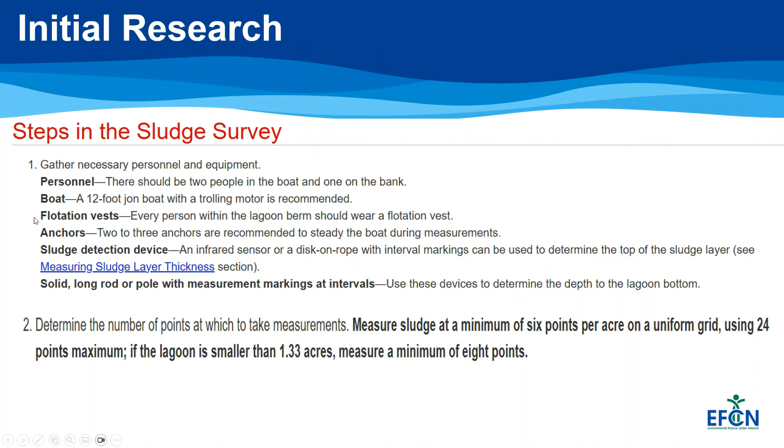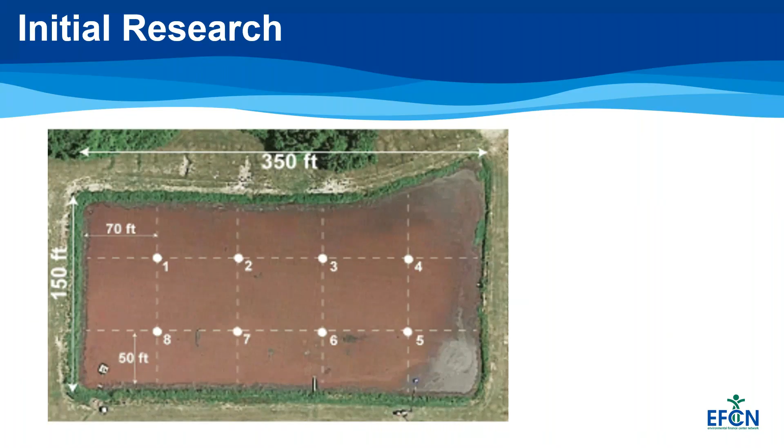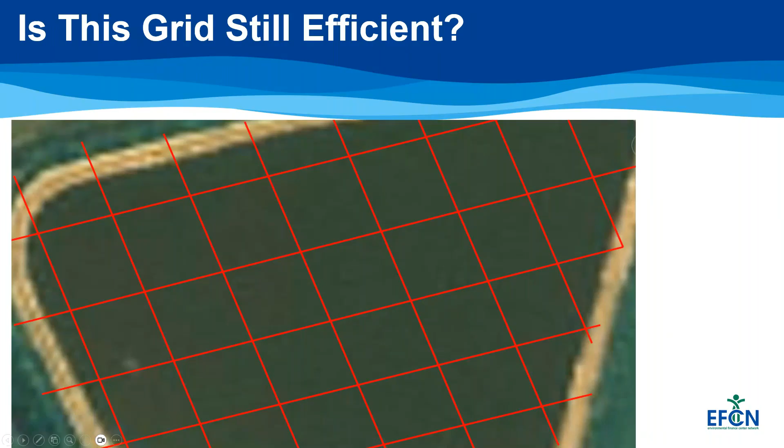Going in a little boat and trying to make sure you stayed in the grid with windy conditions, making sure you don't fall over, grabbing a sample with your sludge judge, mapping it, and moving to the next spot didn't seem like the best use of our time and resources. This could very easily turn into a whole day project or longer depending on the number and size of the lagoons. A grid this size might give an okay representation of the lagoon, but this would be very time consuming, and most places have multiple lagoons, so it could be a multi-day project for 3 of our staff members.

I don't really want to speak for anyone else, but this is not how I would want to spend my very warm summer months in Iowa or anywhere else. It's not comfortable. It's going to be very warm. You won't feel the breeze. Drawing on your map would be hard. And what about when you need to go to the bathroom? Is this what you would really want to be doing with your day?

That's how we have always done it. That phrase should never be said. It's probably my biggest pet peeve in the industry. Just because it's always been done a certain way doesn't make it safe, efficient, or correct. Understand why you are doing something a certain way.

It is okay to still measure your sludge with a small pontoon or flat bottom boat, but make sure you are doing it safely, and make sure it isn't costing you more to devote a required amount of time for your staff to do this rather than have someone come in and handle it for you. Some regulatory agencies require sludge measuring to be done annually. How many hours are devoted to this annually, from planning to execution? How many other projects take a backseat when you have multiple staff members at the lagoons for days?

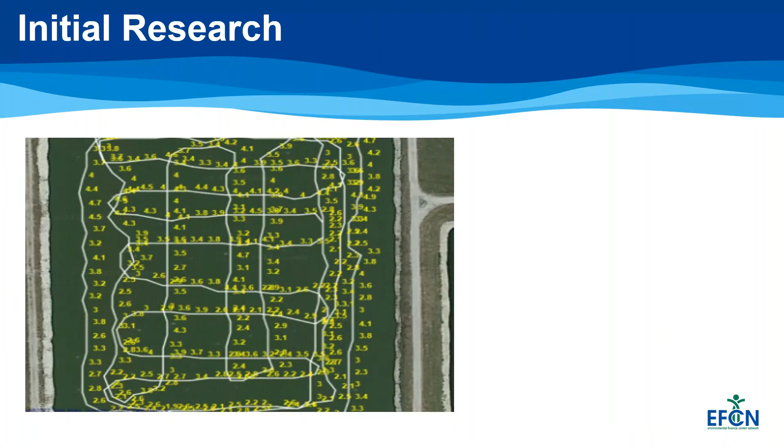One of the first remote control boats we found was really nice and had a lot of bells and whistles. This would have been a great option if we were doing this for a profit. Aside from the cost, we would then be responsible for any damage and repairs, and needed to have licenses for GPS, the data program, and stay on top of needed updates. So we kept looking for further options.

I ended up being able to drive down to southern Iowa and meet up with a company from Centralia, Illinois, and see what their boat was capable of doing. I was able to not only see how they set up for a survey, taking all the necessary data points, like measuring from the control point to the top of the water, but I was able to walk with the employee and see how quickly and easily he could maneuver the boat. I even got to drive it a little bit.

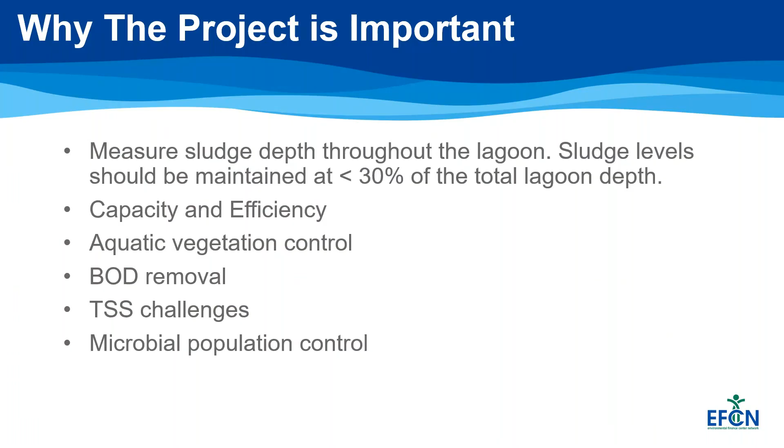Starting with a newly started lagoon, or one that has had the solids removed recently, you'll have a very thin layer of sludge. That will allow enough volume of water to give you the needed detention time for proper treatment. There will be enough water to keep sludge odors to a minimum, and sludge will not build up in front of the influent pipe or be carried out over the effluent weir.

Sludge is composed primarily of organic matter, meaning it contains carbon and is of plant, animal, or human origin. It also consists of inorganic material that either gets flushed, rinsed, or may even just blow into the lagoon. Everybody's sludge is going to be made up of something slightly different based on your influent loads.

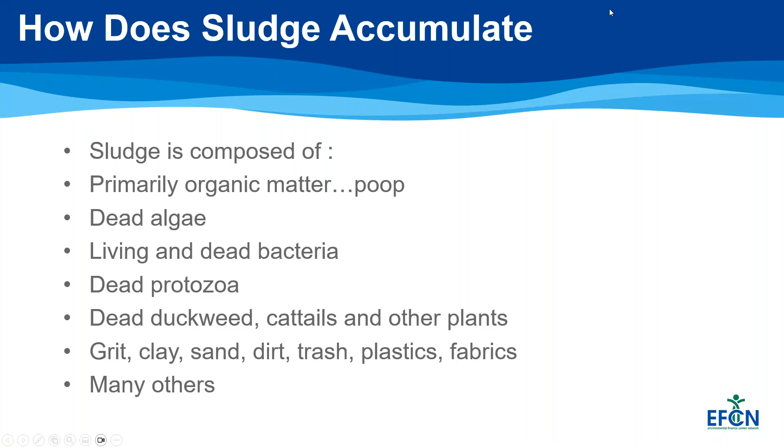Lagoons are different than mechanical plants, which are built with digesters and sludge dewatering equipment. In mechanical plants with sludge dewatering or thickening equipment, you are able to remove your sludge after treatment and dispose of it according to your biosolids plan. This helps you maintain the capacity and efficiency of your treatment process.

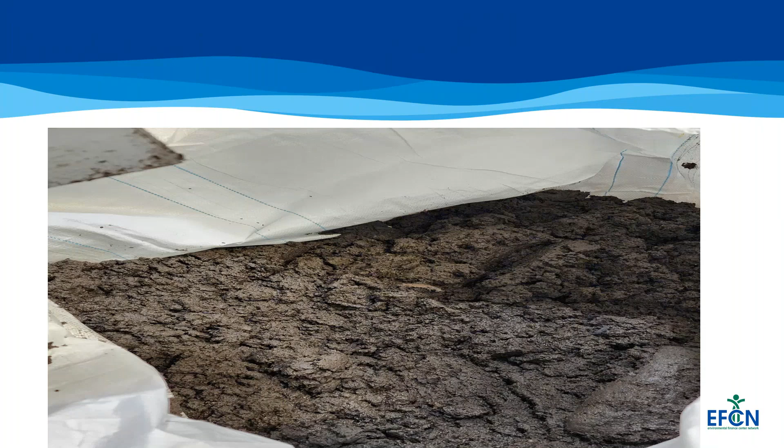Lagoons were designed to store a certain amount of solids in the bottom before disposal, gradually decreasing capacity and efficiency of the treatment processes. As more organics and inorganics flow into the lagoon over time, the sludge will continue to rise. In most cases this isn't a very fast process—it generally takes years to accumulate to a depth where it needs to be removed.

Lagoons were designed to hold sludge and still have detention time for the influent to be treated for a period of time before it needs to be cleaned. Over time, especially if you aren't tracking the sludge blanket, before you know it your sludge will be over the influent pipe, stirring the solids up and keeping them in suspension. This will cause them to flow out with the effluent. You have decreased detention time and your treatment process has lost efficiency. If you are lucky enough to still be in compliance, it won't be long before you are constantly having violations.

Sludge displaces valuable treatment capacity. It creates channeling of sewage flows, creating short circuiting. It feeds nutrients back into the water column, feeding new algae cell growth. And it creates and causes odors that the neighboring citizens are not going to be very fond of.

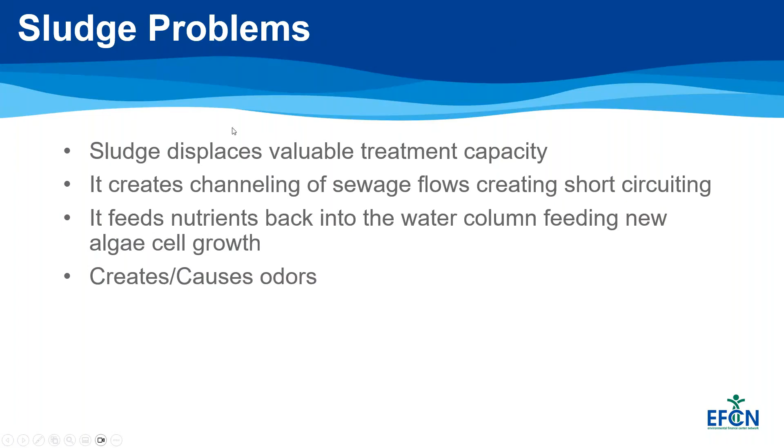From the last stage, if you took your first sludge measurement and realized it needed to be cleaned, you likely won't have the equipment, finances, or a contractor to get it removed in a couple months. While you are waiting and planning, your lagoon will be overtaken with sludge. It was time to plan for this when the lagoon was built. If you couldn't afford to have the sludge pumped out 10 years ago, you likely won't be able to afford it now. There's also no way to meet compliance currently.

You should have started planning day one of the lagoon becoming operational. Even if you waited 10 years to get started, you are in better shape than never getting started and pretending like sludge doesn't exist. At this point you will be having many odor complaints, constant compliance violations, working closely with the regulatory agency to get you in compliance, and worst of all, needing to raise your resident sewer rates drastically to get a loan to pay for the removal of sludge ASAP.

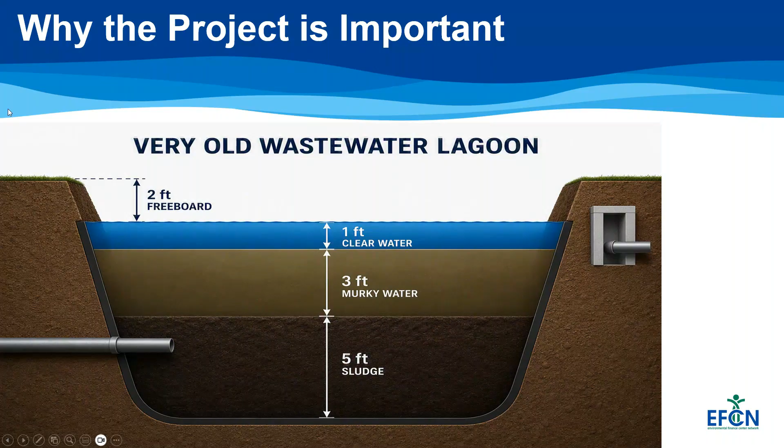All right, our first poll question is: does your community do a regular sludge survey? Yes, no, or not applicable? We'll give everyone a little bit of time to answer.

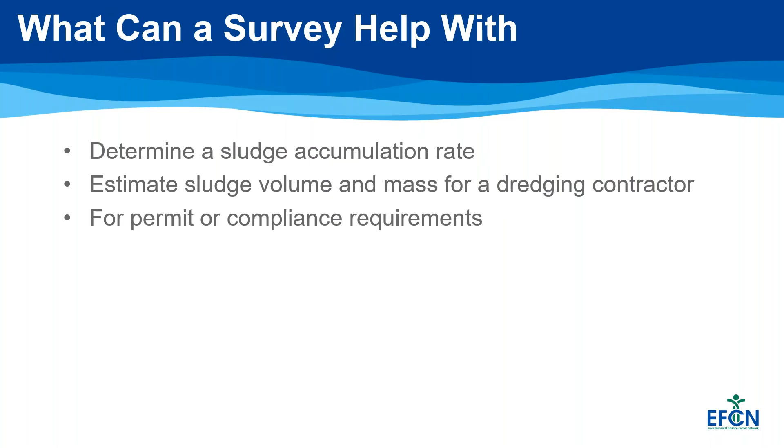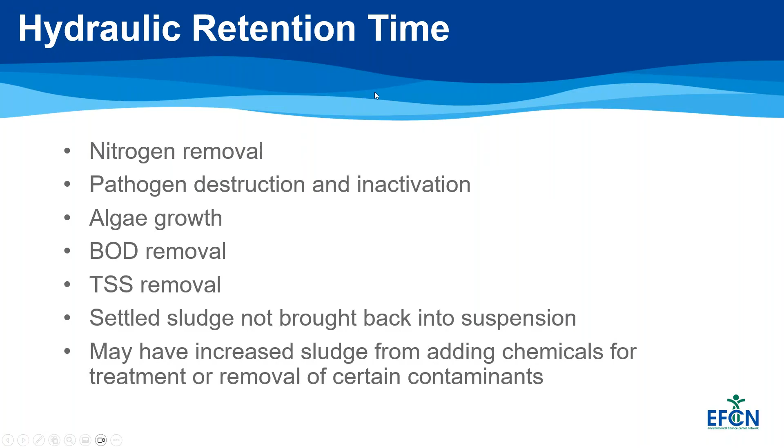Now we're going to measure the capacity in a hypothetical lagoon. I'm not going to try to make you all get out calculators and do the math. I'm going to step through it slowly.

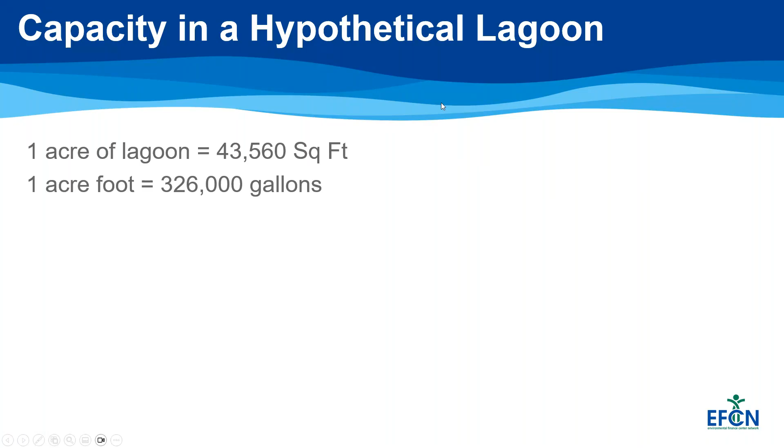To figure out the volume in cubic feet, you take the square feet times the depth. That gives you your volume in cubic feet. Take that volume times 7.48, and that gives you the gallons. Following that method, you're not going to have exactly 326,000. The 326,000 is what is on the WPI or the ABC need to know conversion sheet that you use on the exams.

So we'll take our lagoon. We're going to pretend it's 1 acre and it has 8 foot deep of capacity, and it's designed to have a 1 foot maximum sludge blanket. So you're going to have 7 feet of water. This will also give you over 180 days of storage, and your daily flow to the community is 12,000 gallons.

At that, it gives you 2.3 million gallons of water, 43,560 cubic feet of sludge, and 192 days of detention time.

If you accumulate just 6 more inches of sludge, so at 1.5 foot of sludge, you only have 2.1 million gallons of water, 65,340 cubic feet of sludge, and a detention time of 175 days.

Adding another foot of sludge, you go down to 1.9 million gallons of water. You have doubled your sludge. It's at 87,120 cubic feet, and your detention time is now down to 158 days.

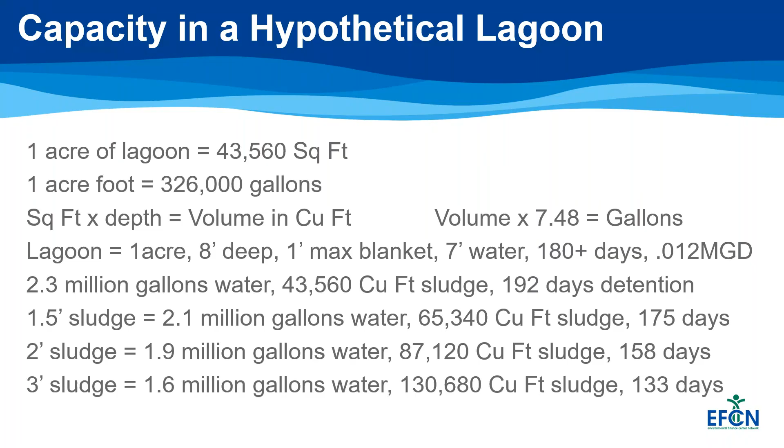Sludge accumulates faster in colder climates. The solids in the waste will also play a factor - how many organics versus how many inorganics you have. Organics can be decomposed to take up less space, but the inorganic material, rocks, sand, silt, etc., will take up more space in the lagoon.

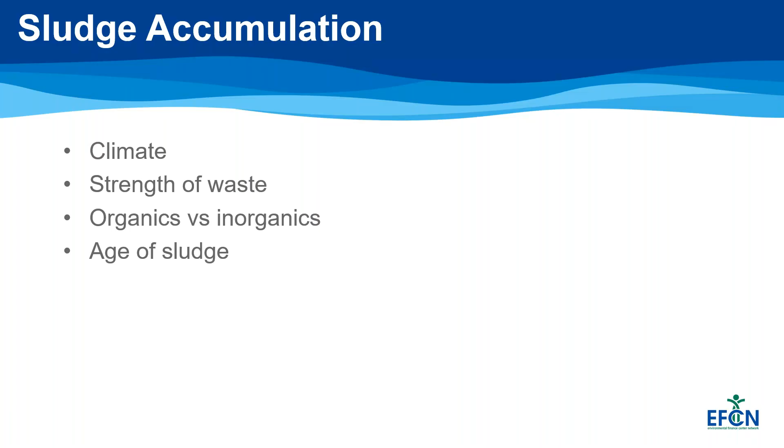It sounds like we have quite a few that are either with a state or a TA provider that don't have to do that. The ones that are here, hopefully, we're able to get them more recent sludge surveys.

A good sludge survey can help with budgeting and planning for when you will not only need to have the sludge removed, it can also help you plan in case the lagoon will not be efficient enough to provide treatment for the growth of your community or the addition of a new business in town. It can help you understand what is going on in your lagoon and how long you will hopefully remain in compliance. It can provide safety to your community by not having to let your operators be in a small boat over wastewater. It will allow more time for your staff to get to more pressing matters within the community.

It had been over a year from working with our vendor after meeting with the state last year from when we were able to actually receive the boat and start doing sludge surveys in Iowa.

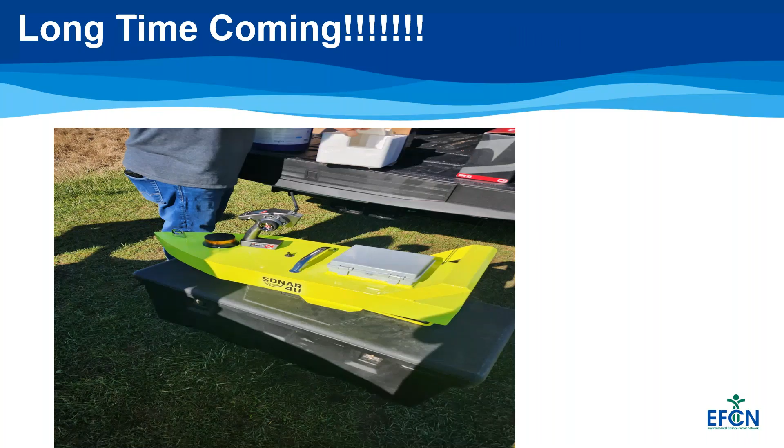It has a predetermined speed, so when you set the cruise control, you just steer it as it goes up there. It'll take the same GPS and sonar measurements every second as it's rolling through there, and you'll have the same pattern of marks.

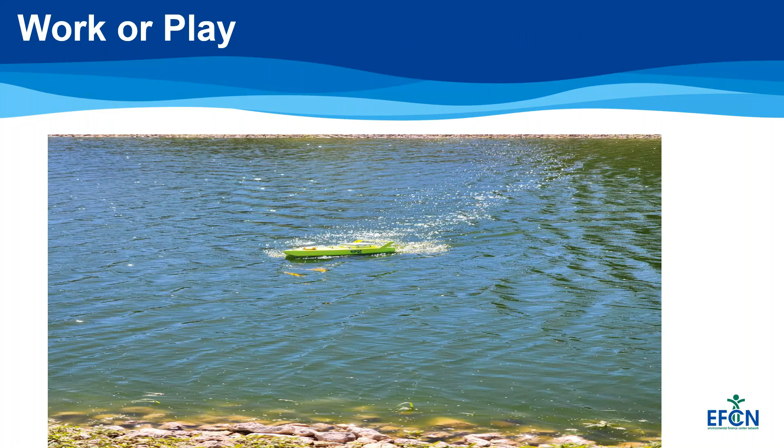What can't we survey? We can't survey spots with duckweed. It will block the sonar lens and give bad readings. We also can't survey a freshly drained lagoon that would have too many solids close to the surface because it will plug the propeller. Rags can easily get sucked up when the boat is in shallow water.

Now, this one we found out firsthand because the very first survey we went to do, we put it in and it just started stirring up too much mud and the boat really slowed down. So we realized we needed to make sure that we had this on at least 2 feet of water to make sure that it wasn't going to plug the propeller.

If the lagoon has a liner, that is generally okay to survey. However, if there are air bubbles popping the liner to the surface, we could drive the boat across the top, but it would not give you a very accurate reading for sludge accumulation. It would read to the liner, which may not have any sludge on it, but it would tell you that that's where your sludge is.

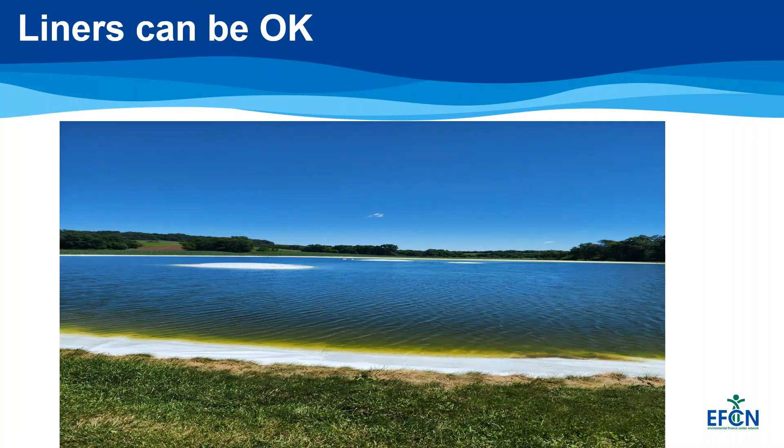Zoe, go ahead and go to the third poll question. All right, our third poll question is, what do you think this service would cost? Under $1,000, $1,001 to $3,000, over $3,000, or you don't want to guess? We'll give everyone a little bit of time to put their answers in.